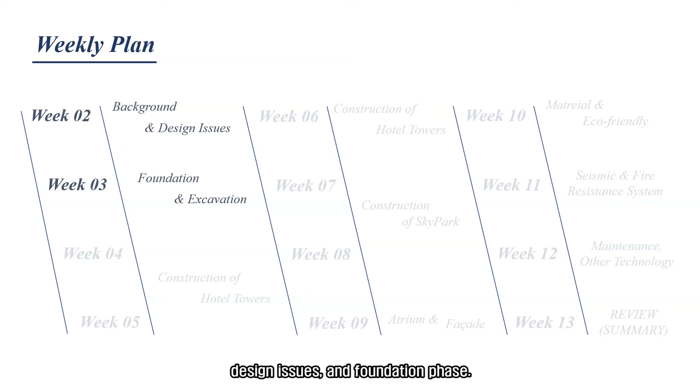The second and third week, we went through Marina Bay Sands background, design issues, and foundation phase. Today, we are going to continue to talk about the construction of hotel towers introduced last week. Before that, let's briefly review the last presentation.

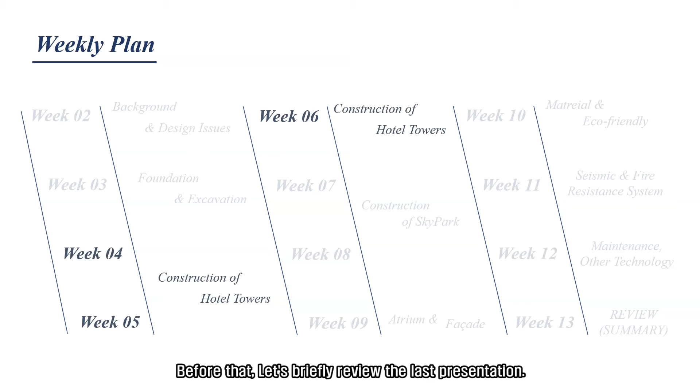We went through the design concepts and geological features of the Marina Bay site. In relation to this, we introduced many of the construction methods used in the foundation and excavation phase of the hotel towers.

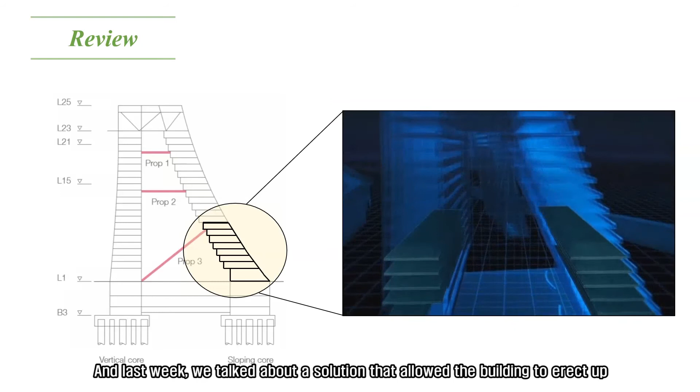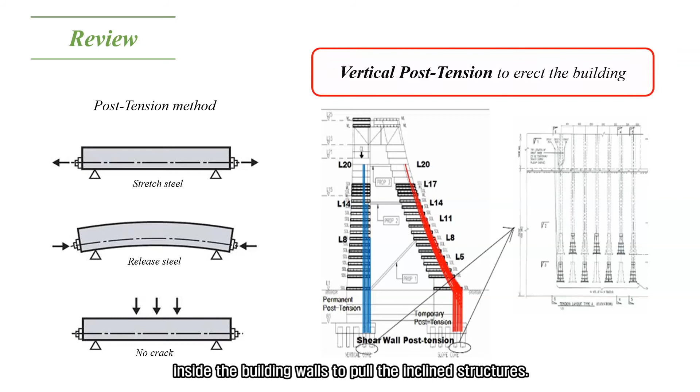Last week, we talked about a solution that allowed the building to erect up, overcoming the overturning caused by the slope of the building's lower part. The key point was the post-tension method. Furthermore, they used creative ideas of inserting a lot of tendons inside the building walls to pull the inclined structures. Thanks to this new technique, they were able to pile slab layers without collapsing.

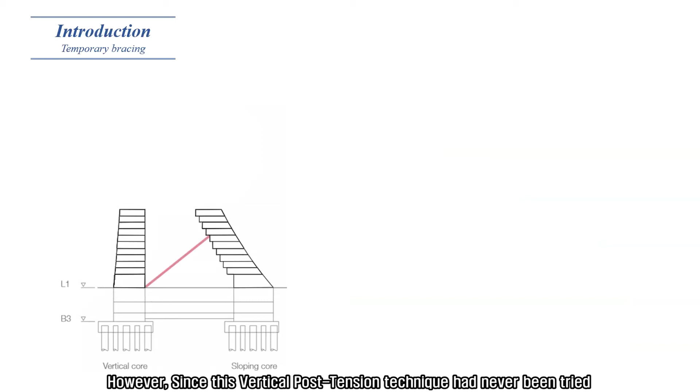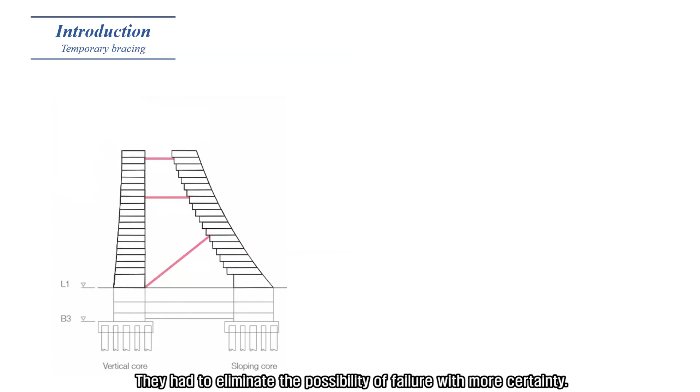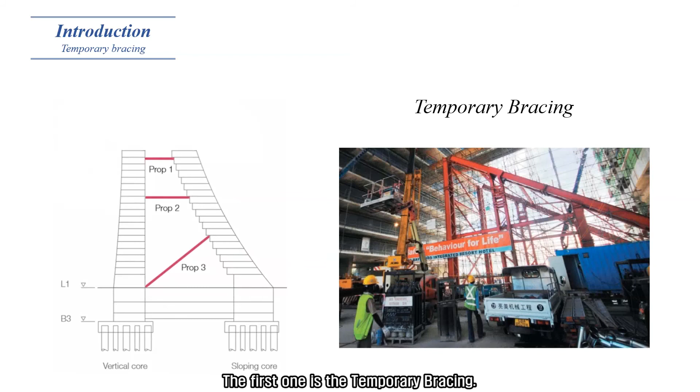However, since this vertical post-tension technique had never been tried, engineers needed a more sure way to prevent collapse. They had to eliminate the possibility of failure with more certainty. So, two additional techniques were used with vertical post-tension: the first is temporary bracing, and the second is transfer truss. Today, we will deal with these two construction methods mainly.

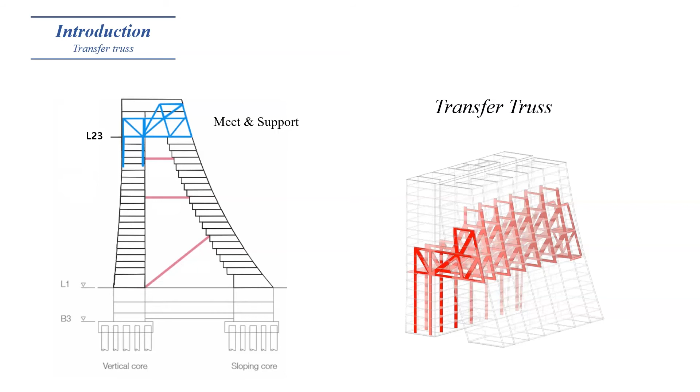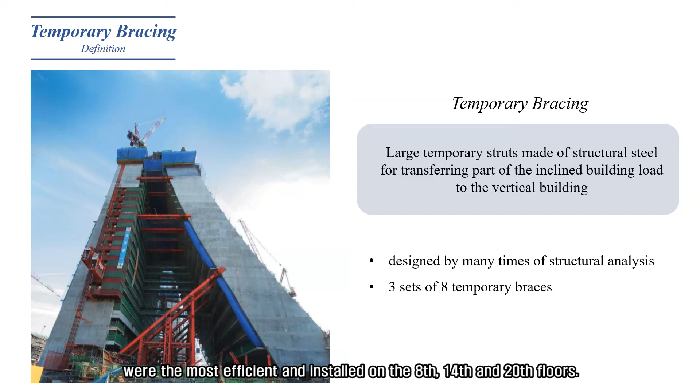First, temporary bracing. Temporary bracing is large temporary struts made of strong structural steel for transferring part of the inclined building load to the vertical building. As a result of structural analysis, three sets of 8 temporary braces were the most efficient, installed on the 8th, 14th, and 20th floors. Each strut is designed to withstand a permissible load of 1,000 tons.

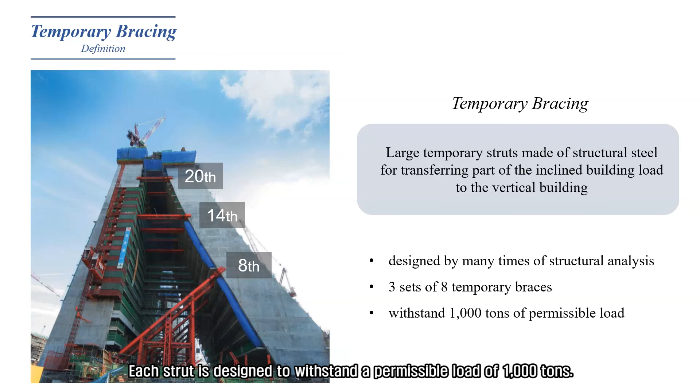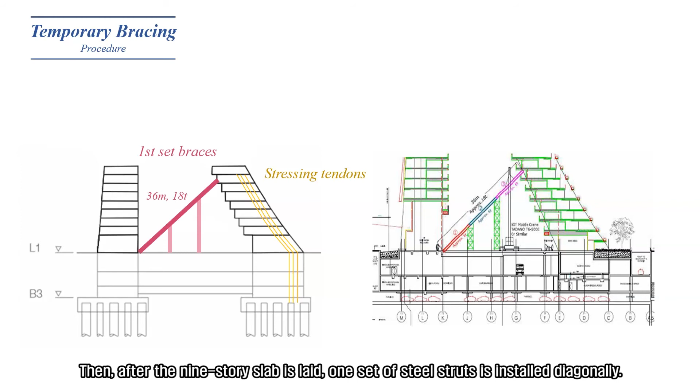After the 8th slab is laid down, stressing is done to the tendons inside the wall. Then, after the 9th slab is laid, one set of steel struts is installed diagonally. The vertical structure was applied with stress to the tendons at intervals of 6 floors, and the leaning structure was applied at intervals of 3 floors.

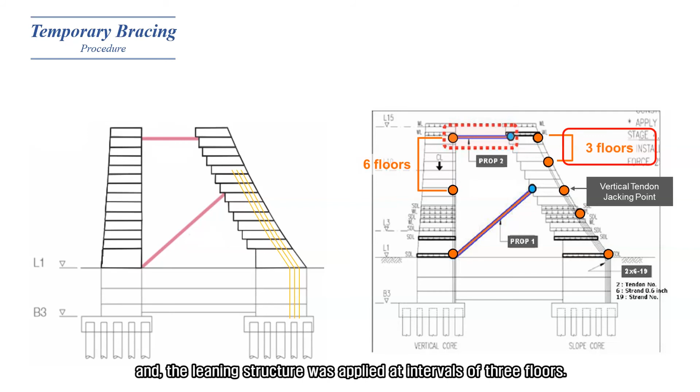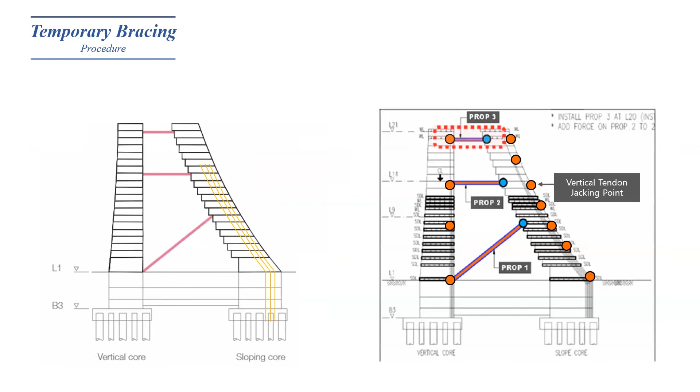The second set of steel struts is installed after the 15th slab is laid out. In the same sequence, after stressing tendons, the final set of struts is installed at a height of 20 stories.

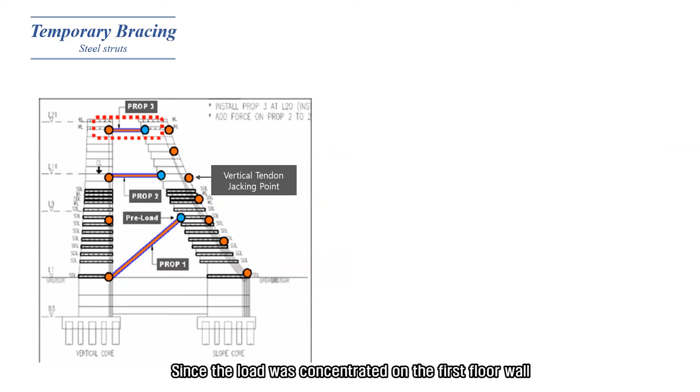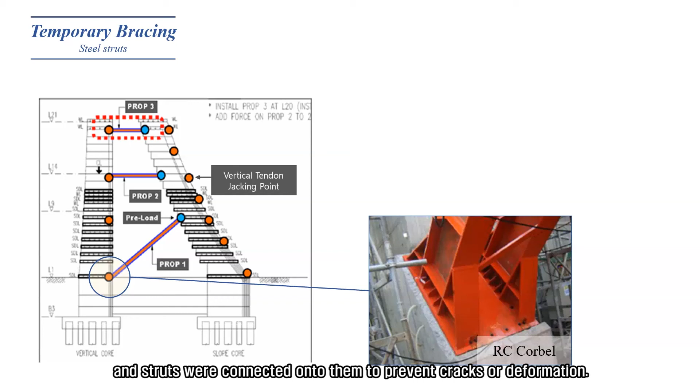Since the load was concentrated on the first floor, concrete supports called RC corbels were installed, and struts were connected onto them to prevent cracks or deformation. A hydraulic jack was installed at the wall connection to remove the load when the temporary braces were removed.

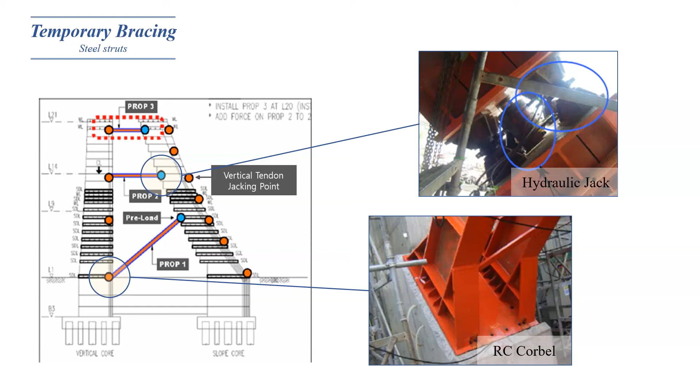Because the struts received a large load of more than 7,000 kN and the span was long, two main steel frames were connected in truss form. The strength used is S355 with H-beams and braces forming a truss structure.

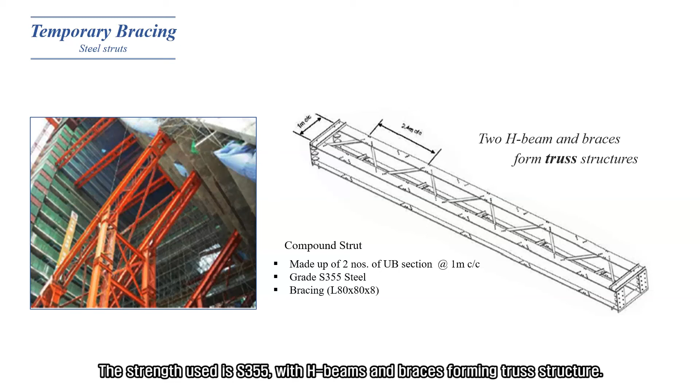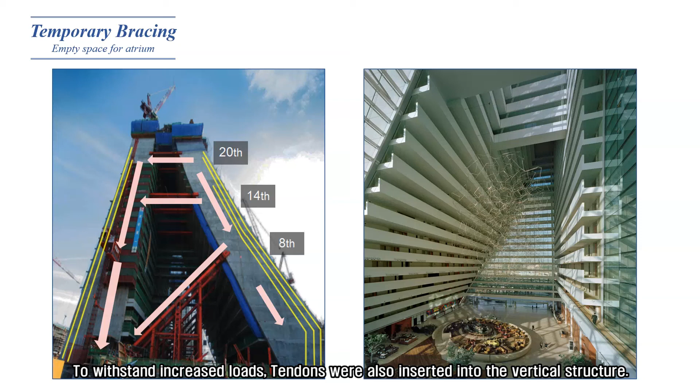As the building went up, temporary bracing delivered the load of the inclined structures to the vertical structures. This could resolve the challenging slope successfully, along with the post-tension method. To withstand increased loads, tendons were also inserted into the vertical structure. The struts were removed later and provided people with attractive empty space.

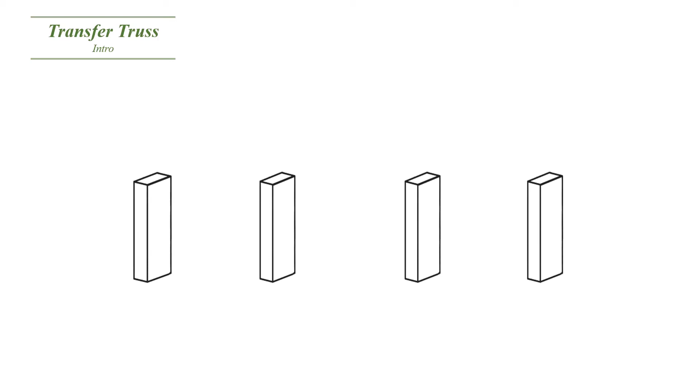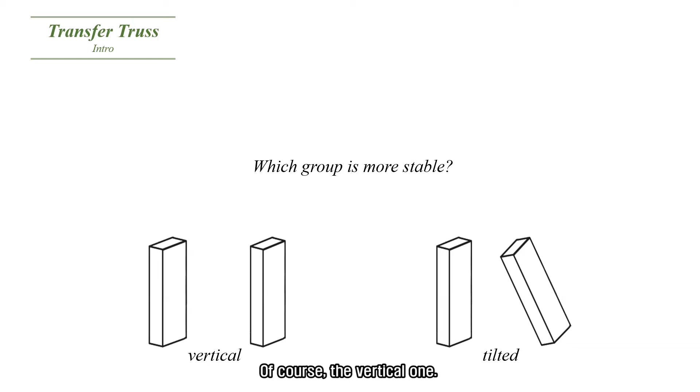Suppose there are 4 same blocks. Make 2 pairs and place books on them. One pair is vertical both, and the other is tilted. Which group is more stable? Of course, the vertical one. A tilted structure collapses easily, even with a small force.

Now, think of Marina Bay Sands hotel towers. The 3 sloping buildings support more than 60,000 tons of superstructure. Even with the same load, sloping structures are more vulnerable. If the 2 structures do not move as one, the sloping structure would slide or break.

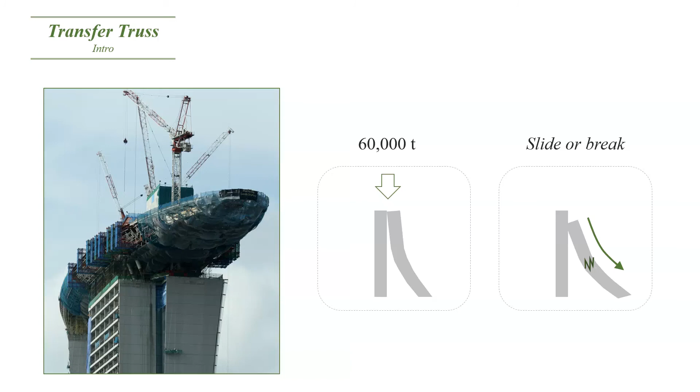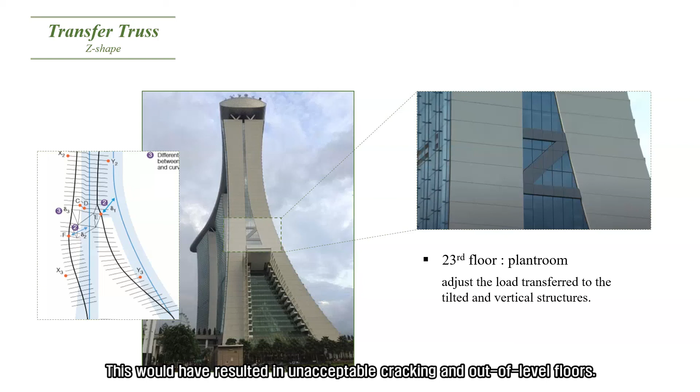The key to making the 2 structures move like one is this shape. This is the 23rd floor of the building, where the plant room is located, performing a vital role. Without this floor, the 2 walls would act independently, and significant differential displacement would occur across the corridor at the upper levels. This would have resulted in unacceptable cracking and out-of-level floors. This is what it looks like inside.

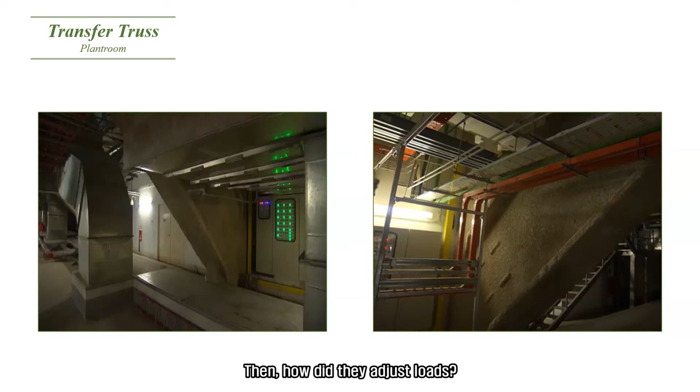Then, how did they adjust loads? Please look carefully at this triangle shape. Inside the wall on the 23rd floor, large steel structures called the transfer truss are installed. This structure literally transfers parts of the inclined structure's loads to the vertical structure.

The inclined structure is designed to receive 40% of the upper load, and the vertical one is designed to receive 60%. It is an important structure that permanently reduces the load acting on a sloped structure to prevent deformation of a building.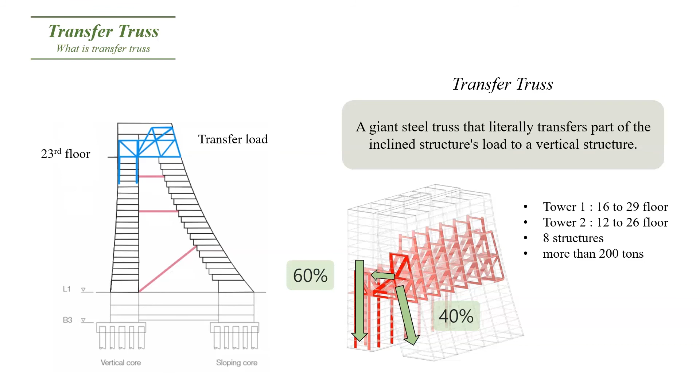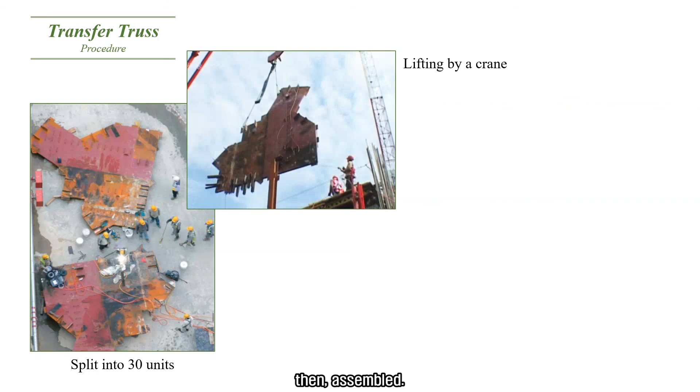Because it was a very huge and heavy structure, the workers divided it into 30 units, lifted by a crane, and assembled it. This is a field picture of it in working. Through where the 2 buildings meet, they could move like one body.

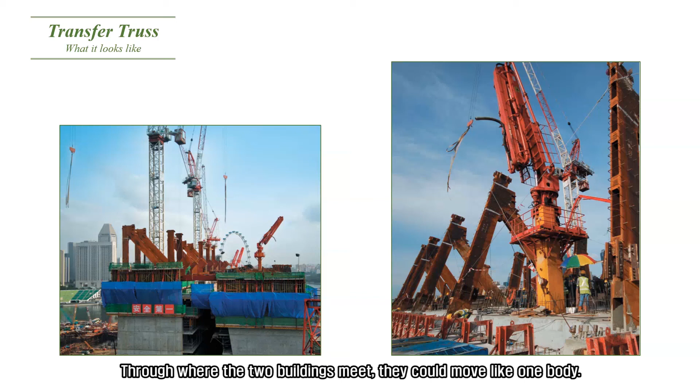We were curious about the actual load distribution. We'll look at the design, draw it, and then analyze the load distribution. Assuming a total load of 100 kN, the result was that 55 kN was applied to the vertical structure and 45 to the sloping structure. It was similar to the information we obtained.

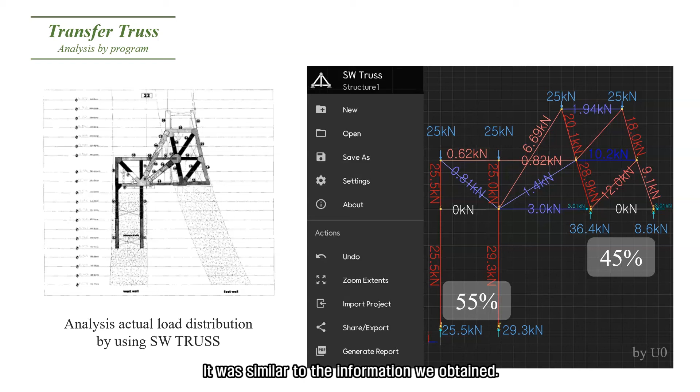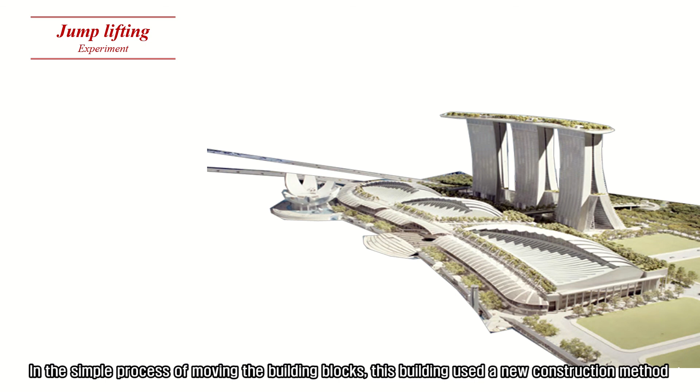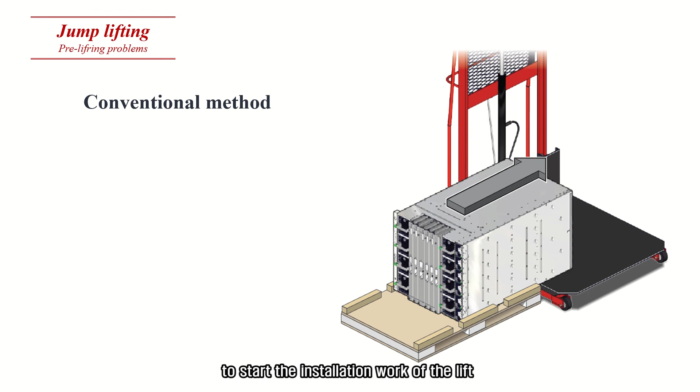Let's take a look at the collateral construction of the Marina Bay Sands Hotel. First, jump lifting. Let's talk about how they moved building constructions. In the simple process of moving the building blocks, this building used a new construction method called jump lift. The conventional method of installing the lift is to start the installation work once the frame construction is completed up to the machine room of the lift, and the machine room is handed over to the lift installer.

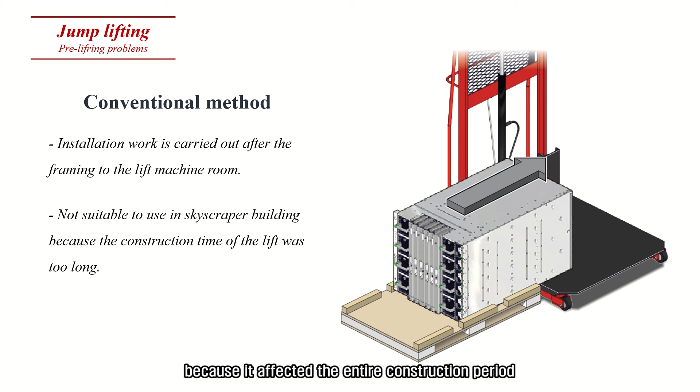However, this construction method took too long, affecting the construction period inside the lift, and the finishing process of the lift lobby parts was also affected because it impacted the entire construction period. Accordingly, in order to install the lift, it was necessary to shorten the construction period and find a way to install the lift without affecting the construction finish.

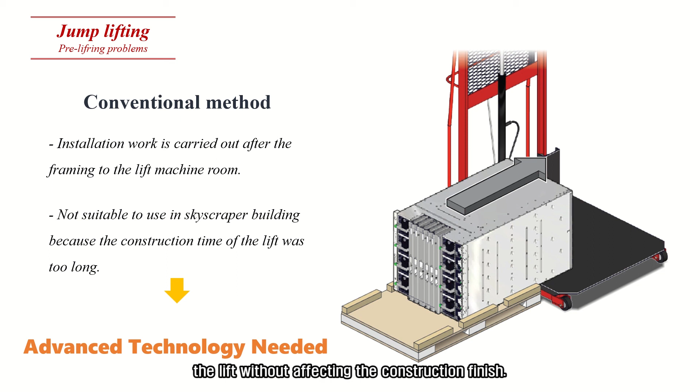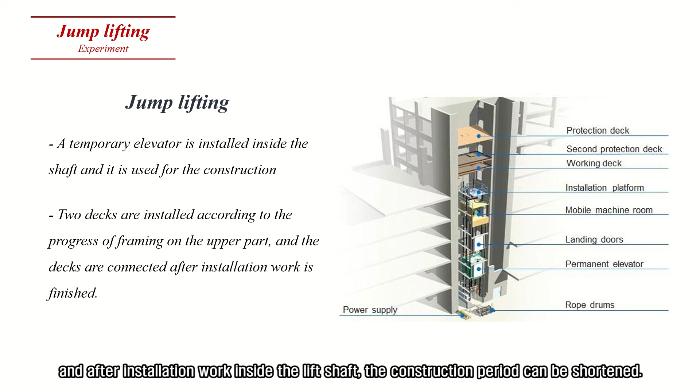The new construction method applied to the site is jump lift installation. This method is a system in which a temporary elevator is installed inside the shaft following the progress of the lift shaft frame, and replaced with a permanent elevator after completion of the frame. In this method, two decks are installed in accordance with the progress of the upper frame, and after installation work inside the lift shaft, the construction period can be shortened.

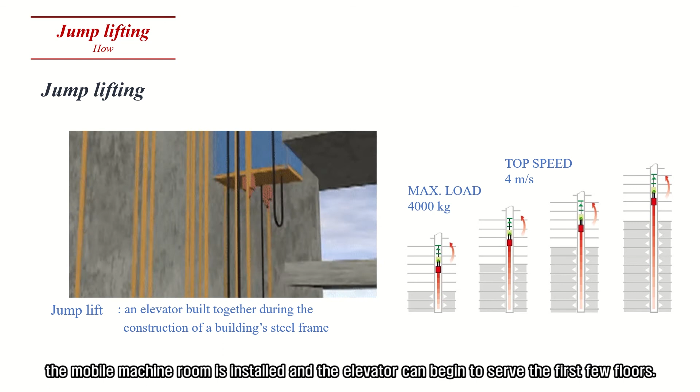When construction has reached the floor set in the jump plan, the mobile machine room is installed and the elevator can begin to serve the first few floors. As the building grows higher, jump lifting follows, with new floors being served after each jump.

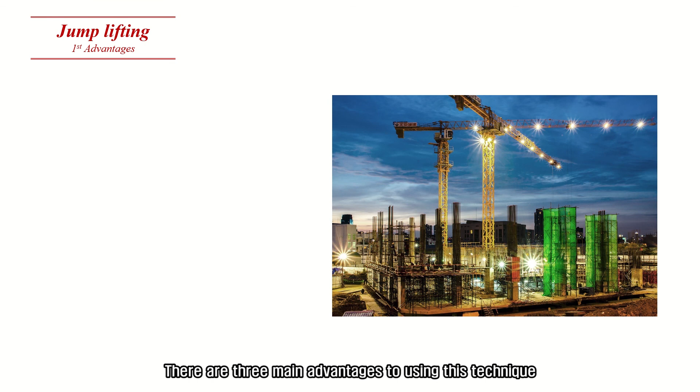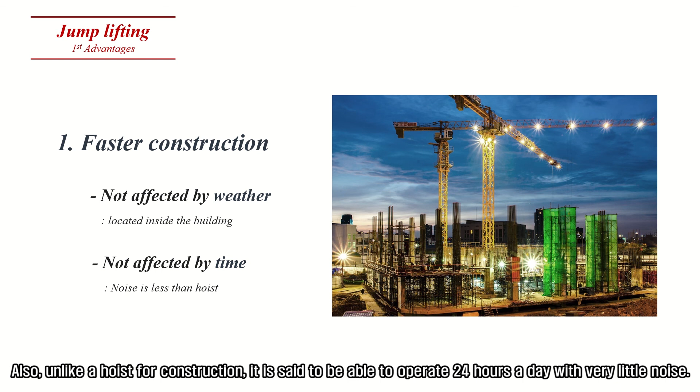There are three main advantages to using this technique. The first is shortened construction period. The jump lift is not affected by the weather because it runs inside the building. Also, unlike the hoist used for construction, it is said to be able to operate 24 hours a day with very little noise. The second benefit is increased safety.

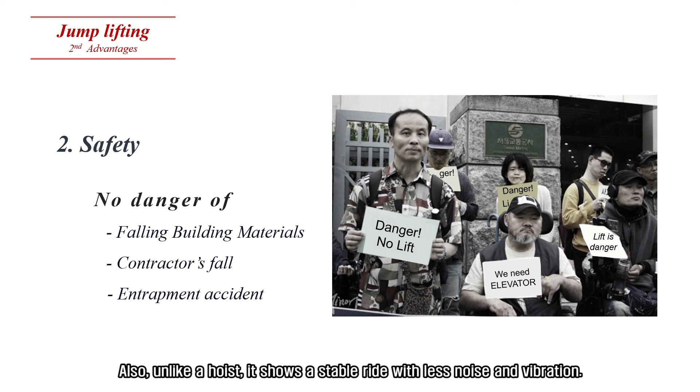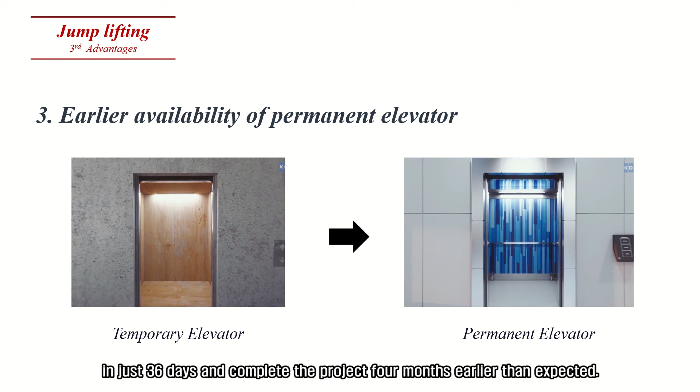A third advantage is the earlier availability of a permanent elevator. Since the elevator is installed at the same time as the construction work, it can be used as a passenger elevator, which can shorten the finish time of the building. With this method, Marina Bay Sands was able to complete the elevator installation in just 36 days and complete the project 4 months earlier than expected.

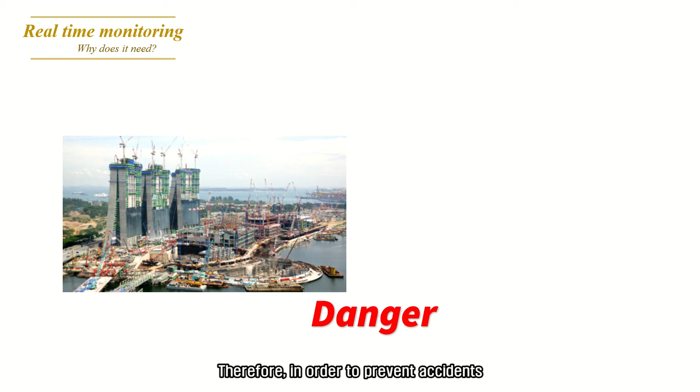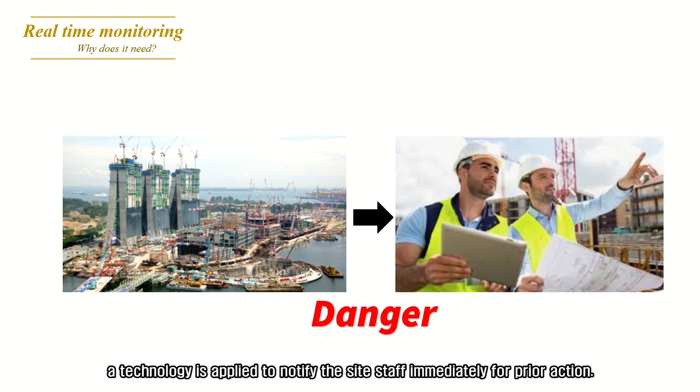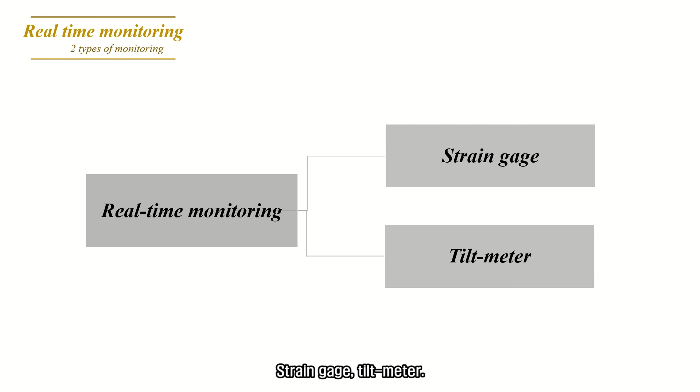Although these new technologies were introduced, the Marina Bay Sands Hotel has a great risk of construction. Therefore, in order to prevent accidents, real-time monitoring is applied. If the estimate is exceeded according to the pre-structural analysis, a technology is applied to notify the site staff immediately for prior action. Two major parts of real-time monitoring technology have been applied in this hotel construction: strain gauge and tiltmeter. Let's take a look at these technologies.

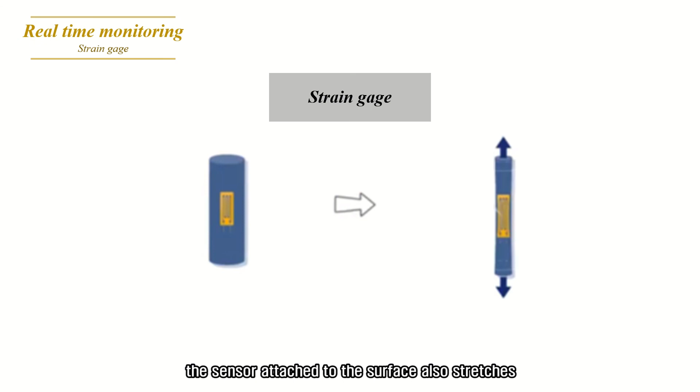First, strain gauge. A strain gauge is a sensor that measures deformation from external forces. As the concrete expands under tensile force, the sensor attached to the surface also stretches, making the path thin, resulting in greater resistance. Using this principle, we can measure the tensile force that concrete receives.

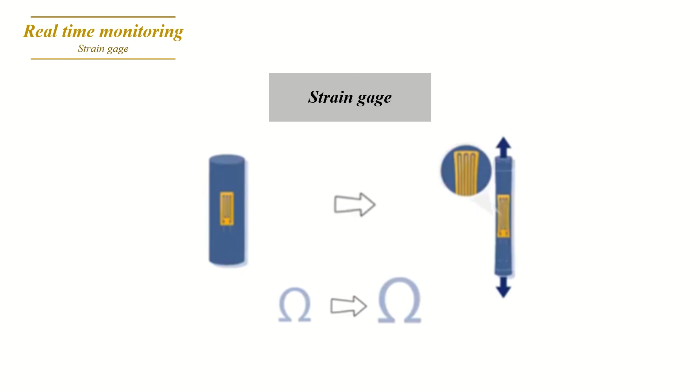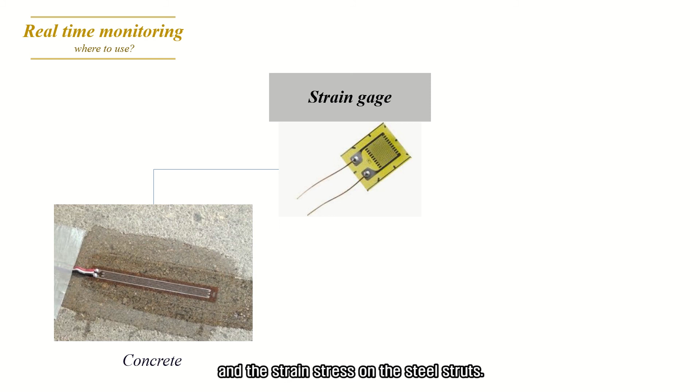This strain gauge allows us to monitor the tensile force of concrete, the force acting on RCPT beams that bind the vertical and sloping buildings, and the strain stress on the steel struts.

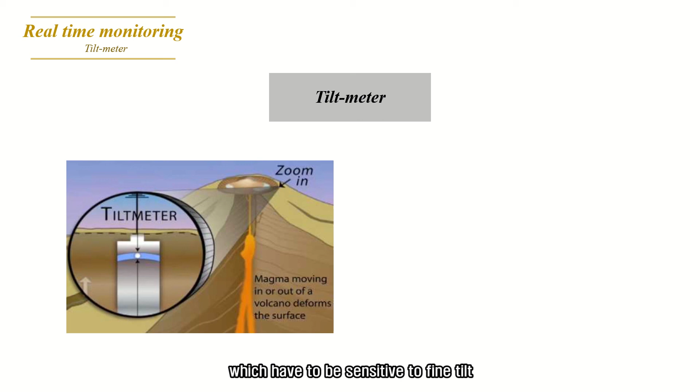Tiltmeter is a machine that measures slope. It has been used in volcanic areas and dam construction, which require sensitivity to fine tilt, but it is also used in modern times to construct skyscrapers.

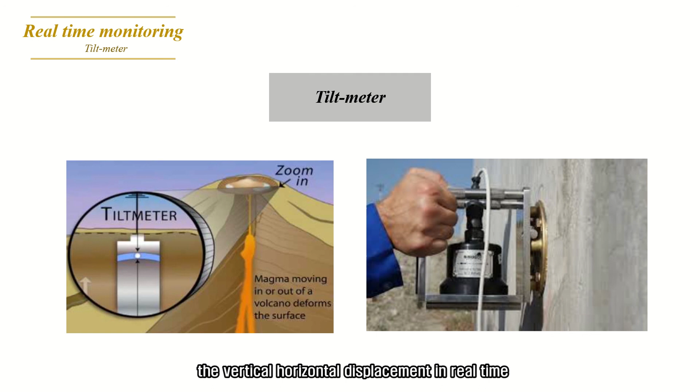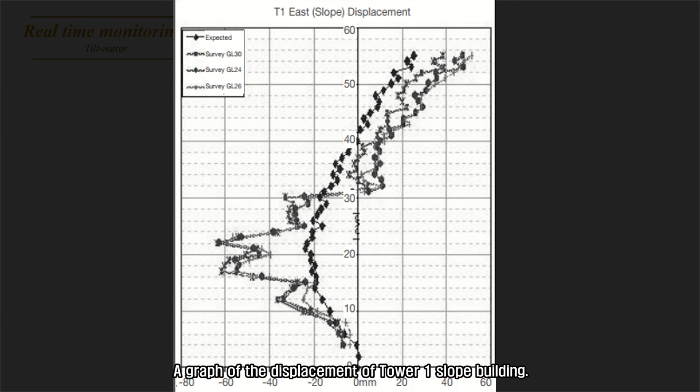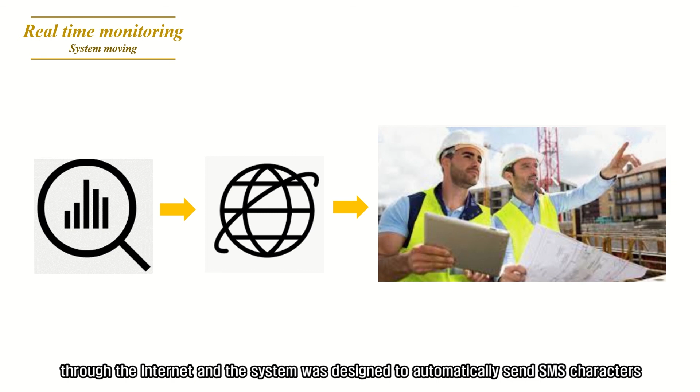These monitoring results are available in real time through the internet, and the system was designed to automatically send SMS messages to the person in charge when the risk level is reached.

Today, we presented about the construction of hotel towers. Thank you for watching this video.